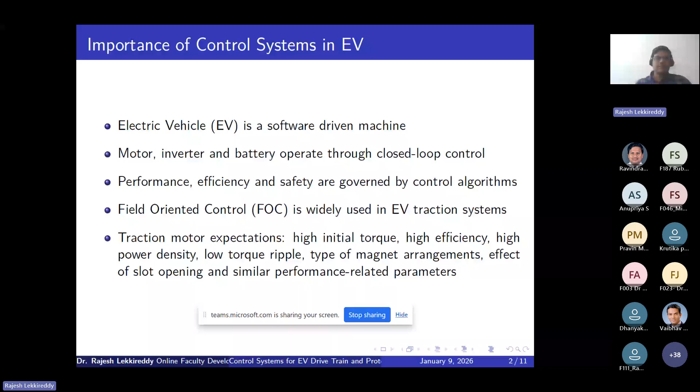So then we'll move to the FOC. This algorithm is known to everyone. So why is FOC crucial, why is it important? It enables the independent control of both flux producing and torque producing components. It works similarly to a separately excited DC machine. The flux producing component is adjusted by the direct axis current, and the torque producing component is adjusted by the quadrature axis current.

So basically we are converting the three phase currents to two phase, which are rotating in the DQ frame. This theory is well known to everyone; it has been used for the past 20 years. So I don't want to focus more on the FOC. Why FOC is important is it gives a wide range of operation, high starting torque, and fast dynamic response. It improves the overall efficiency.

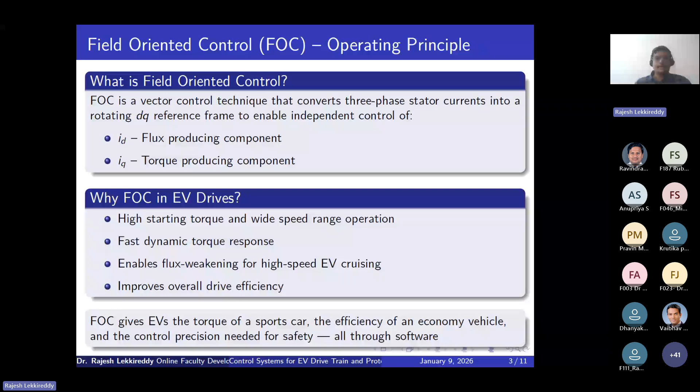So if you think in realistic terms, for a sports car, the torque should be high to quickly reach its maximum speed. If you go to the economy vehicle, the efficiency should be high. So all these requirements can be fulfilled by the algorithm, that is FOC.

Then we'll come to the protection of EV drives. If you see the EV, it is a system of electrical, thermal, and mechanical conditions. So continuous monitoring is required on all these devices to keep the vehicle safe and operating in a precise region. So what are the key parameters we can consider as faults, and what is their impact? What will happen if the value goes beyond a certain range, the maximum value, let us say.

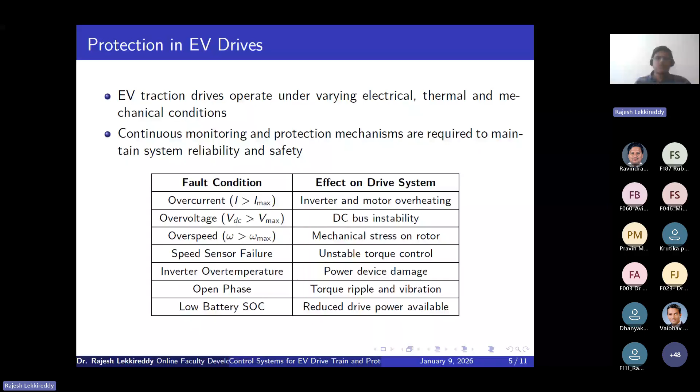And those values will go to the inverter. And that was a loop. That is an entirely closed loop. So now I'll focus on how protection logic will be implemented inside MATLAB.

There was a layer, you can just imagine, an FOC layer, where we'll get the currents as feedback. Then what the FOC controller will do is give the PWM pulses to the inverter. Then the inverter will convert DC to AC, and that goes to the motor and the transmission and wheels. This was one layer. Above that layer, there should be a protection layer.

For example, let us consider if some glitch has happened in the FOC and the current is going beyond the limits. At that specific point of time, what do we need to do? We need to implement a certain algorithm. To stop the vehicle, we will have to stop the motor or cut the power supply to the motor, and to do that we implement logic just above the layer of the FOC.

I would like to demonstrate this protection logic. We can implement this logic either in Simulink or in Stateflow. Either way works, but why Stateflow is preferable for protection, I will tell you. So basically, the user has given some input. He is requesting acceleration. At that point of time, how much torque should be given to the motor? How much current should go? All these come as inputs, and how much current is flowing through the inverter comes as feedback to this supervisory controller.

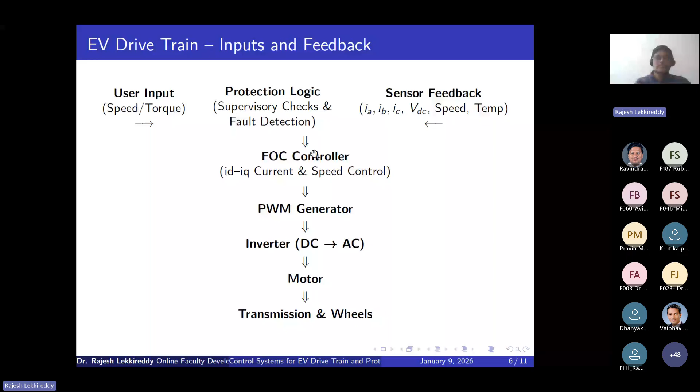So why Stateflow? As I said, we can implement the algorithm either in Simulink or in Stateflow. But why was I sticking to Stateflow? Stateflow can perform better than Simulink if the logic is event driven. Event driven in the sense that, let us consider the vehicle is in the halt state, and now I want to get into ready. I have to give some input. If the condition is satisfied, the vehicle moves to ready mode. And from ready mode to running mode, some conditions have to be satisfied. It is event driven. It also suits hierarchical supervisory logic, like a parent model with a subsystem inside.

Another importance of Stateflow is that we can see it in the form of states. We can visualize where the trouble was. Let us consider you designed the algorithm for small parts, and after a few months it became bulky. We can visualize where the problem was. It is a graphical representation. It has different states. Within the states, there are different conditions. There is an action. There is an event.

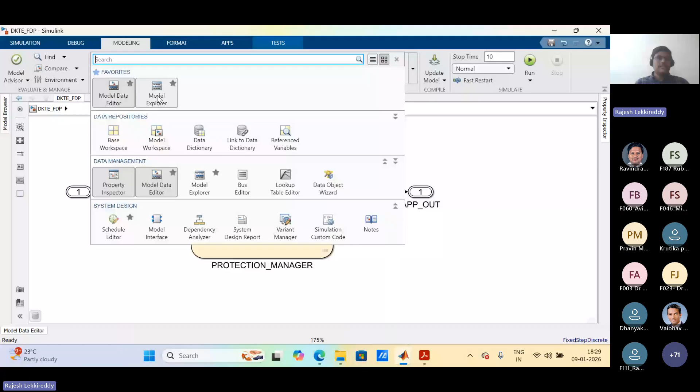Before that, I mentioned the data dictionary. So why is the data dictionary important? First we'll see the data dictionary, and then we'll move into the Stateflow and simulation and how I have done it. In the modeling there are a few tabs, right? There is an option called Modeling. There we can find a lot of options, like data dictionary, link to data dictionary. So try to open the Model Explorer. In the Model Explorer, go to File, then New, then Data Dictionary. If you click Data Dictionary, I will show you directly.

This is how it will come. So it is trying to open a new data dictionary. This is how it would be to create. We have to give some name. Let us consider demo. Save. If you can see the demo, it will give some options for us, like design data.

So similarly, I have given EVDD, that is electric vehicle DD, and there was a design data. So inside design data, I have created some variables. I can utilize those variables in the further algorithms developing in the Stateflow or Simulink, wherever it is. So this is how design data will look like. It was very clear and nothing is there here, right?

Now, if you go to the add tab, there was an option called Simulink bus. So if you click Simulink bus, it will give some bus name. So we can rename it like application in, let us consider. These are the inputs we are giving to the Stateflow. That's why I have given it as application input. So don't give the name as input.

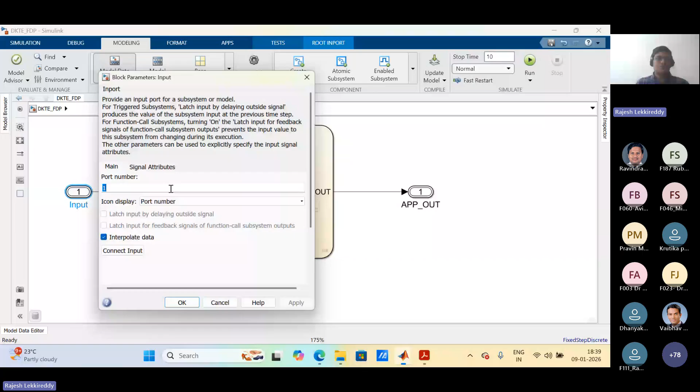Just go to the signal attributes. There is a data type here. You click the data type, go down. We have created a lot of buses in the data dictionary, and the data dictionary is now linked with the simulation file. So it will show all those buses created in the data dictionary, like application in, out, CMD control, fault sensor, everything.

What we need basically is to give the mother bus. What is the mother bus? There is application in, and inside application in there are a lot more buses, right? Those are child buses, but we have to give the parent bus so that we can access anything inside that parent bus. Application in and application out are the two parent buses. Application in is for the input, application out is for the output. That's it. Very simple.

The bus input I have given, just apply and OK. Here the sample time you can change, otherwise you can keep -1, so it will take whatever the default sample period is. Now this is how it looks. You just type chart. That is from the Stateflow library, and it will appear like this.

Once that is done, you give some input. You can connect this input here like this, and for this input we go to signal attributes, apply, OK. The same thing. Similarly, if you want output, same thing. You can give out there, select application out in the attributes like this, connect it to this chart, and our chart is ready.

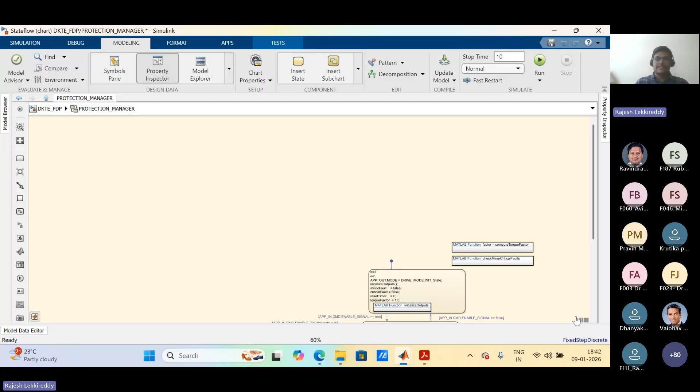Now inside the chart, it is like a flow chart. Everyone knows the flow chart, right? There is a start, then some condition, yes or no. If yes, we go this side. If no, we go this side. Then we come to the next condition. If yes, this is the condition. If no, this is the condition. Then there are sub conditions after that in a hierarchy, right? This is how we can implement this. It is simple like a flow chart.

I'll show you. There are a lot of options here in Stateflow. You can go through Stateflow, you can easily understand it. It is very simple. This first rectangle is a state. We just drag and drop here. This is how it looks.

This icon indicates the default. Default in the sense that it will first come to the state which is considered the default. So if you start this entire Stateflow, this chart will be activated first, because it is the default. The connections are similar to Simulink. We connect the constant to the gain, we just drag it, right? Similarly we can just drag and drop, and everything will be connected.

As I said in the presentation, I have considered these states: initial, ready, run, fault, and shutdown. In the shutdown, I have considered a few more, like derate. There are two conditions I considered here. If the current is 100 amperes, we consider that as 100%, right? If it is just above 100%, I consider that a fault. If it goes beyond 150%, 1.5 times the current, then I consider that a critical fault. This is how the fault can be segregated, critical or minor fault.

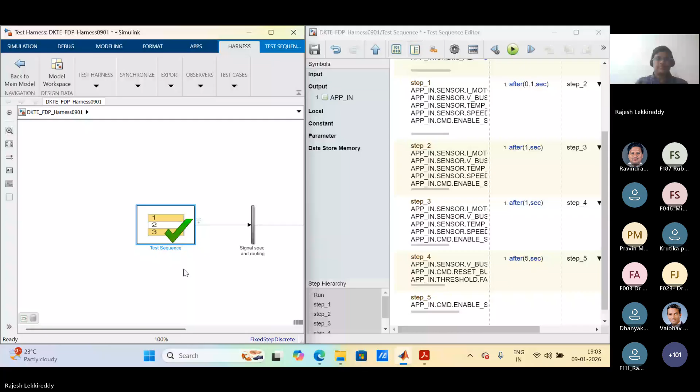Now we will check. This is not a harness one. Yeah, this is a harness. See, now I'll run step by step. I'll go to the simulation. Okay, this is a run coverage. Rename it. As of now, I'll turn off the coverage. Then I'll go to simulation. Now I kept maximum as 10 seconds.

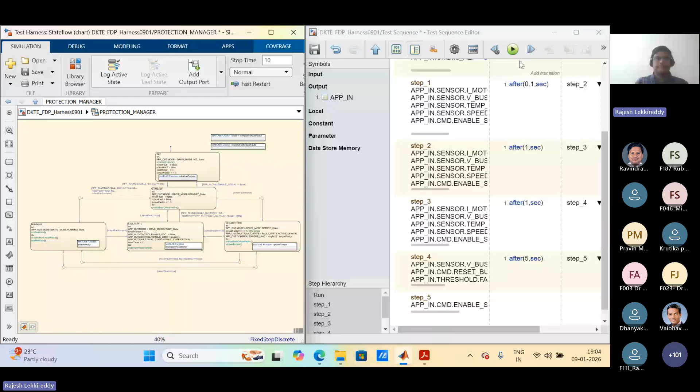Now I'll run it. If you see, if I press run, it will come to here. Now it is at the run state. Now you see there is no sample time. If I click, so 0.1 seconds. So 0.1 second is satisfied. That means it is true. So once it is true, it will go to step 1 and check all these variables.

It has been identified. The next cycle, it comes to the chart at 0.2 seconds. Then it will check whether there is any fault or not. If there is a fault, the next step it will go to some other state. That should be the expected one, right? It has to go to the derate state. Why? Because the current is just beyond the maximum value.

So if you see here, now it was checking the condition. Yes, this condition is satisfied. If the condition is satisfied, then it will move to the derate state. Then the torque has been reduced to 50%. Now if I click, then again it will check. If the minor fault, second state it will check. So it will be there at the derate state. Why? Because I kept it as 1 second. It will wait for 1 second, then it will go to the next step.

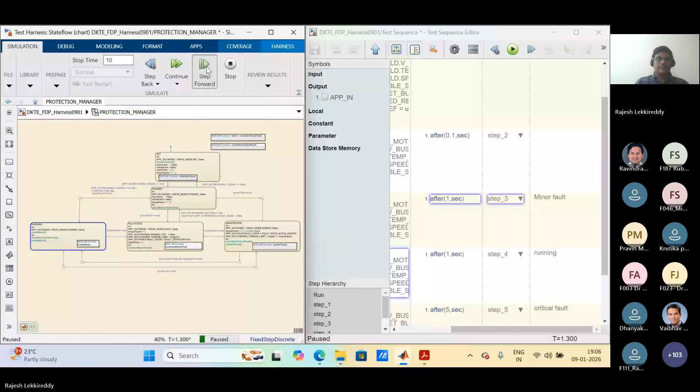So now it is operating at the derate state. Now 0.3 to 1.3, that is 1 second. Now again it is moving back to the running state. Now it is here. Now the expected is it should be at the running state for another 1 second. Now it is coming to the fault state. Why? Because here the voltage is given as 1000. So it should be the critical fault. See, now it is in fault state.

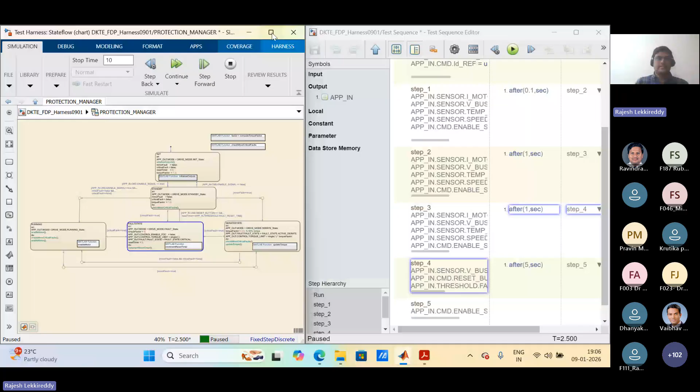If you see the variables internally, if you see the reset timer here, it is 0, right? Now I'll quickly run it. It will stay here for 5 seconds. Now see, reset timer is 1. Initially it is 2.3, now it's 3.3. So it has become 1 second. So reset timer is 1. At 4.3 it will become 2. Then 3, 4, 5, similarly.

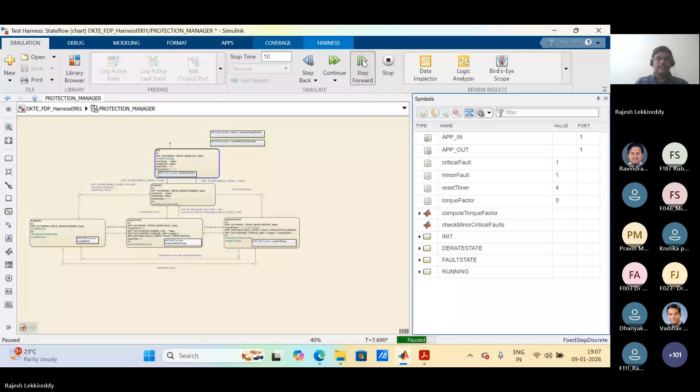4, 5. See, it went quickly to here. Why? Because this condition is satisfied. It went to the standby mode. In the test sequence, I have given 5 seconds. After 5 seconds, the enable signal should be false. So this was satisfied. It went to the initial state.

So now visually we can understand this is how it was working. But we need some proofs, right? We need some proof to show other team members, for our reference, that it has worked. So to check that, there is a data inspector in MATLAB that comes here in the state chart. If you click the data inspector, we need to log the signals. This is what I did here. If you see here, I logged signals on the output side and the input side.

Once that was done, this is how it looked. These are the 4 blocks I subdivided. We can check it from here, and select the different patterns. If you look at the left pane, if you click protection manager, this is an output basically. These 3 are the output. This test sequence is an input, right? So this is the sequence: this is an input and this is an output.

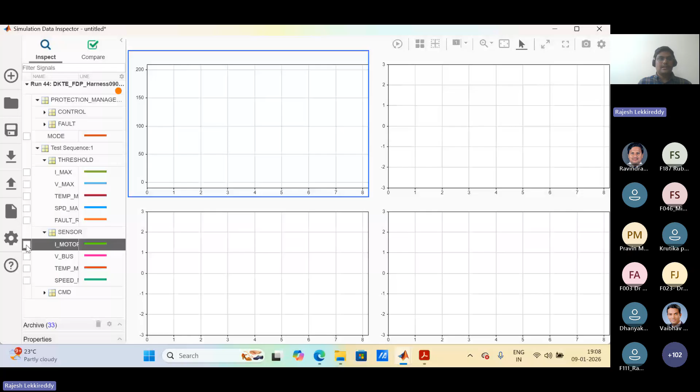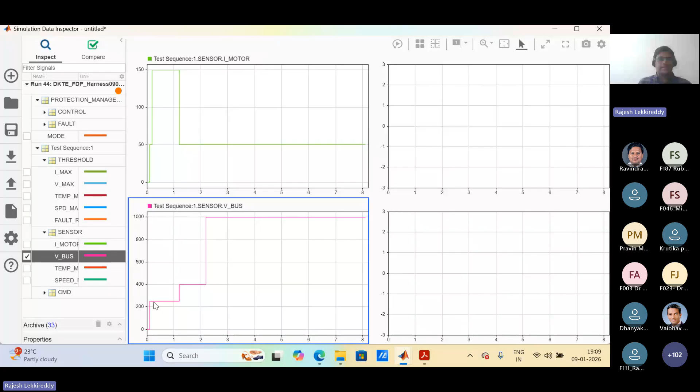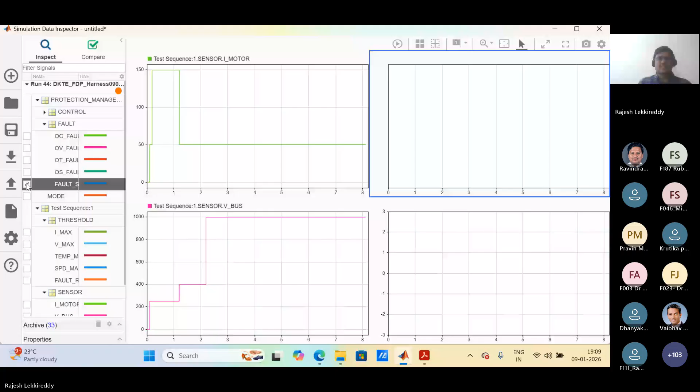Now we will check the fault state. Initially no fault. Then it went to active derate. Why? Because the current is greater than 100 amperes, so immediately it went to derate. Then after some conditions it came back from derate to the no fault state, because the torque has been reduced and the current came down. So there is no fault, it is running. Then after 2 seconds we gave an input of 1000 volts, so immediately it went to the critical state, and it stayed there for the entire time period.

And here we can see the mode. Initially the initial state, then standby, then running. The current went beyond maximum, so it went to the derate state. Again the current came down, so it came to the running state. Then the voltage is maximum, so it went to the fault state. It stayed in the fault state for a certain time period, then came to standby mode after the reset. If you count from 2.3 to 7.3, there is a 5 second period. After 5 seconds it came to standby mode, then went to the initial state in the next sample period.

So this shows the proof that our algorithm is working fine. This is just one test case I have tested. We can make 1000 test cases. We have to check everything: for this voltage and this current, for these combinations, all the conditions should be satisfied. This is how in industry we check test cases. This is called MIL testing, model in loop testing. I designed the model and tested that model using the test harness. So this is one thing I needed to share.

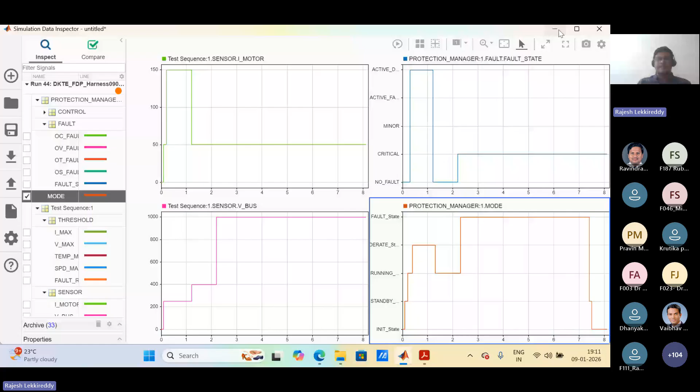Another thing: let us consider our model is working fine. Now I need to generate the C code from the model. But while converting this model to auto-generated C, there might be some glitches. It is not proper every time. If my model is working fine, we can't say 100% sure that the entire code will work. That code may fail. There are certain conditions, like fixed point tools, where some points may get mismatched, so the output we get in the model might not match the C code output.

That is true. So how can we check our model is entirely correct? If there is a glitch in the C code, then we have to come back to the model and make the changes, do the model in loop testing again, and then generate the C code.

Then the C code outputs have to be matched with the model in loop testing. So this is entirely a cyclic process basically. But manually, it is not possible to check everything, right? So let us consider, this is a very simple example. There were more than 10 charts for the comparison. Every time manually, it is not possible to check whether the charts are matching or not.

So to overcome that challenge, what is the way we can do it in MATLAB? Yes, there is a way called the Simulink Test Manager. It will reduce that burden. It will do everything, and it will give what the difference in the charts is, where the difference is, and what the tolerance is. If there is a difference, how much difference it was, 100%, 10%, 1%, everything in detail it will give visually.

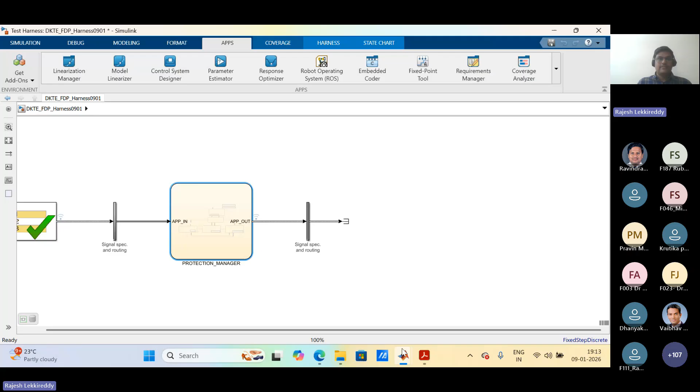Go to the Simulink Test. I'll save and close. See, I already made a Simulink test. I'll just open it directly. If we click the Simulink test, this is how it will open. So just go to the test. There is an option called new, then test file from the model. Just select which model you need. So we did this one, right? 0901. You just select that one and open.

And here the test type you can select as equivalence. Why equivalence? We are comparing model in loop and software in loop for the equality test. So I selected equivalence, added the path, and created it. It is already open, so I'll go directly. This is how it will come. This is the model we are checking. If you click this model, these many options will come. There is an option called simulation 1 and simulation 2. Simulation 1 is for the model in loop testing. Simulation 2 is for the software in loop testing.

So what are the changes we need to do? A very simple change. Go here and check the harness. By default, it will come. Here, just change this simulation mode to normal. Normal is model in loop. If you want to do software in loop, then you select software in loop. So for simulation 1, I did this one. If you go to simulation 2, then in the settings, I made it software in loop.

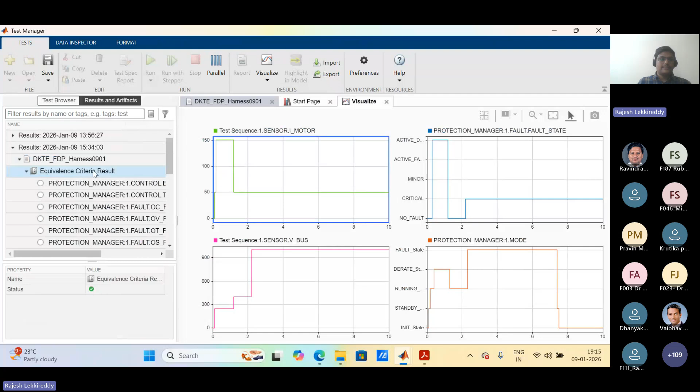And what it will do internally for the equivalence: the model in loop will be tested 2 times and it will compare those model in loops again. The result will always come with no difference, right? The same thing has been compared. See here, the equivalence criteria it has shown. If I drag, output 1 is normal, output 2 is normal. It is comparing normal 2 times. It will give the difference as 0, of course. If I go to the equivalence and click any one random variable, see, this is enable FOC.

So basically how the test manager will work, if I have a compiler: it will match those graphs and tell what the difference is and how much tolerance. So it will reduce our manual burden. It will make everything automatic. If you want, you can compare everything. So this is how we can do it in the Simulink Test Manager.

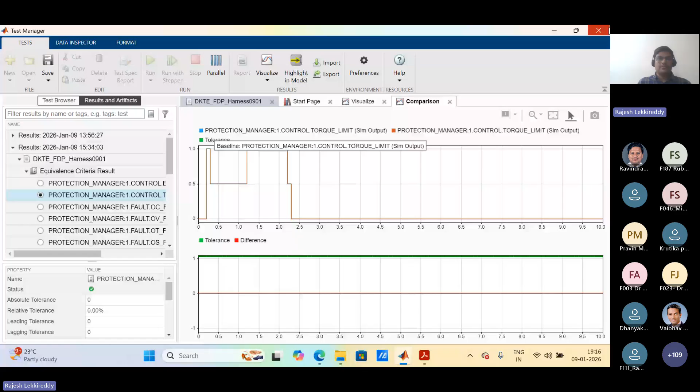If we want a report, let us consider, then go to the test. This is a test sequence report. It will generate it, but we can skip it right now. And one more thing I just want to cover quickly is the coverage. Just 2 minutes are required for that.

So what I said, right? We need to follow certain standards like MAAB, MISRA, ASPICE. So how can we check? We won't be able to check manually, right? It has to tell us: this is what you have missed, this is what was done, this is where you haven't covered the test cases. So some automatic tool has to tell us what was missed.

For that, just go to the apps, and this is the Coverage Analyzer. Just click it and the coverage will come here. The coverage is off here, so just turn it on. Now simply run the analyzer.

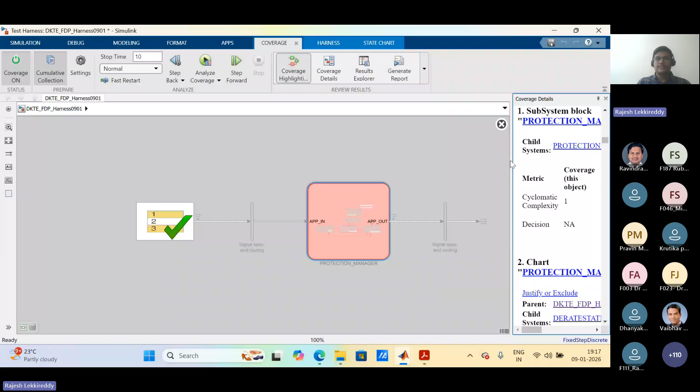Now if you see here, this is how the report is. It has a lot of pages. Derate state has been executed 9 times. Fault state is executed 51 times internally. Yeah, there are a few red lines. Why those red lines? I'll tell you.

If you see here, this temperature max, we haven't checked it. If you remember, in the test cases we have checked only two cases: one is for the current and voltage. We missed the temperature and speed. So we haven't checked it, we haven't touched it. The test case is a failure, so it will show this is a failure. That is what this red one is saying.

So it never came to true. This test case you have missed, that is what it is saying. Even for the speed max, this true is failed. So that is what it will show. It has a lot of pages. This entire coverage will basically say this is what you missed, this test case you have missed. So you can add test cases to pass this.

This coverage should be 100%. Everything should be 100%. Otherwise, something has been missed. This is what basically it will do. So I quickly close it. This is what I wanted to share, the live demo for a particular algorithm development. This is how we will do it.

So quickly, what I did is basically we need to develop the model with the data dictionary. Once the model is ready, we need to write the test cases by creating the test harness. We need to cover all the test cases. Once the test cases are finished, we have to check the outputs. If you feel the proper output was there, then you go to the Simulink Test Manager. You check the model-in-loop output and software-in-loop output and compare whether there is any difference or not.

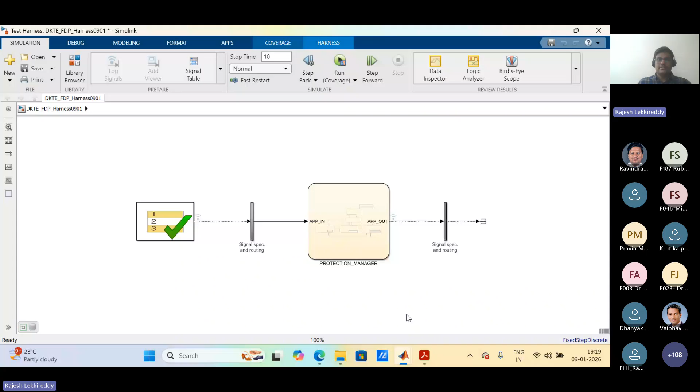So if you come here, it won't come basically here. Otherwise, give generate C code, that will pop up. Why is it not coming? Because the harness is open here. Once the harness is open, it will get locked basically. Now see, everything has been opened.